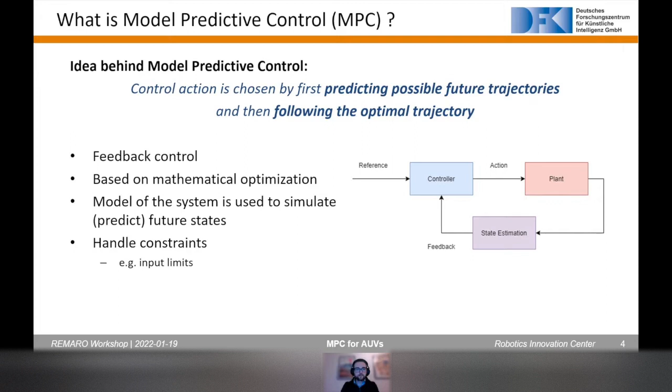I do want to give a brief overview about this, but as I know you get another workshop more dedicated towards optimal control and LQR, a lot of these things will show up again. So I will just go briefly over this. But yeah, it's important to give you an understanding.

So essentially, to predict future states, we can use a discrete description of our system dynamics, a discrete system model, and this can look like the equation shown here. We have x at time step k plus 1, the next time step, and this will be a function of the states at the current time step, x of k, and an input vector u also at time k.

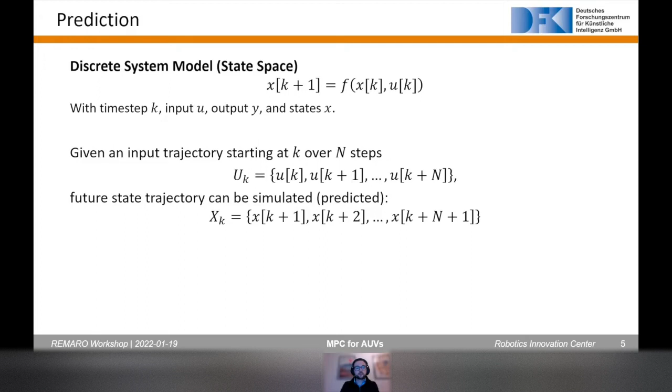With this, we can iteratively compute the system dynamics at the next time step, the next sampling interval, and thus iteratively calculate a whole trajectory. So for example, if we have an input trajectory, we can calculate all future states, provided, of course, that we know the current state. So this is the prediction part already covered.

What we have to do now is essentially calculate a whole bunch of these trajectories, and then we evaluate them based on some cost function. We can use a quadratic cost function for this, where we put a cost both on the states and the input. With this, of course, any state that is not 0 has a cost. So you can also think about this as a state deviation.

So maybe x is your error that you want to minimize. Works in the same way. Here, let's say we want to regulate all our states to 0. Then this is the appropriate cost function. And we also want to penalize using a lot of input. These x and u are for all x and u in their respective trajectories.

Similar as before, we've talked about this 2 times already today, so this should seem somewhat familiar. We have again weight matrices where we can decide how much we want to penalize the use of input and how much we want to penalize the state deviation. According to this cost function, we then get the optimal trajectory, which is the trajectory that leads to minimum cost.

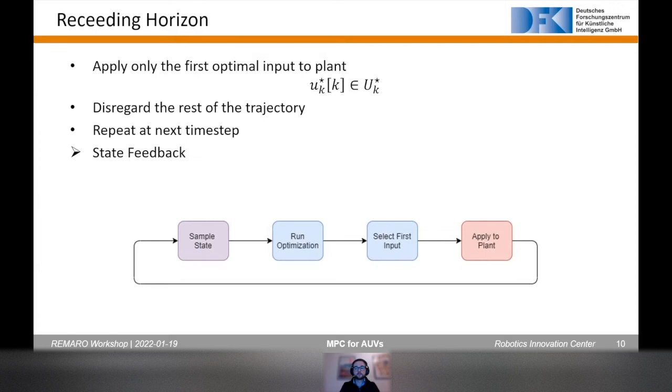Okay, let's come to how we implement this on underwater robotics. So first of all, let's try to motivate why we want to do this. There are many good reasons. As I said, thruster constraints can degrade performance in traditional control systems if they are not considered inherently. That can lead to limit cycles, for example. And so it is desired to represent those also in the control law.

And then, of course, we now have the possibility to get good models, and we actually want to use them and be able to exploit them. And that is something that MPC can do, and it can also handle coupled systems. So there are quite a number of advantages that make it applicable to AUVs. Another interesting thing is that AUVs are typically characterized by slow dynamics.

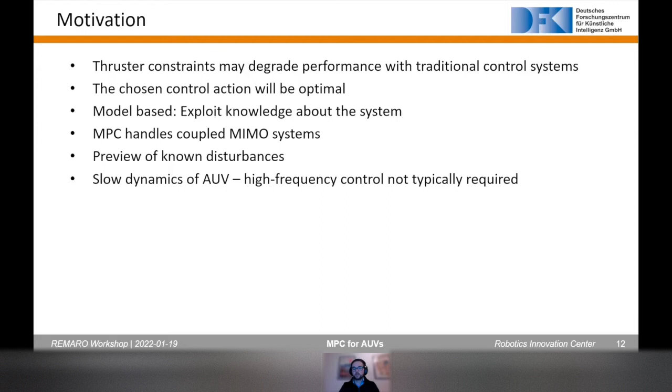And since MPC is computationally costly, high frequency control is rarely achieved with MPC, at least for very long prediction horizons and very high system order. And so here it should be much more easily applicable.

But one thing that we use it especially for in research, and also done by a master's student of mine, is for a disturbance preview. So that means in some cases we are able to predict disturbances, or external forces, that are acting on our system, for example, by a moving manipulator.

So if the manipulator is controlled by an operator, or just follows a given trajectory, then we know in advance how it is moving, at least to some degree. And why not use this already in the control law? We can simply do this by including this as part of the system model.

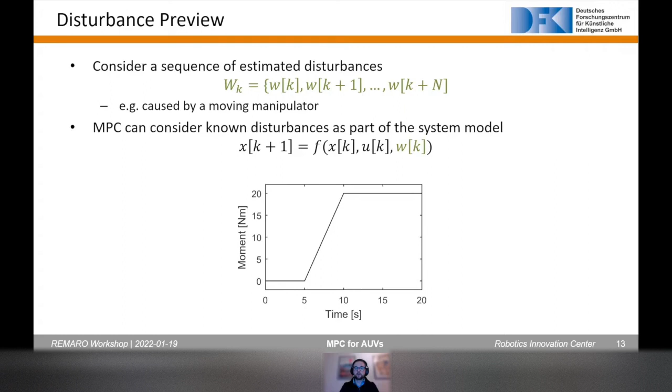And so a disturbance caused by a manipulator could be something like a ramp seen here. Of course, it's a simplification, but we give some sort of torque on one degree of freedom, and we try to compensate that. And this is what has been done. So here, based on quadratic programming and a linearized model of the system, we'll essentially try to keep the vehicle in a neutral orientation. And at 5 seconds, we apply this disturbance, and what we can see here is how different approaches lead to different results.

So in the open loop case, this disturbance is actually quite large and leads to a deflection of about 40 degrees. And if we have MPC but without preview, then we can lower this already to about 5 degrees, which is not perfect, but the MPC here itself is not very aggressive. And if we then include the preview, then we can see that we can actually very much get rid of the disturbance, and what we're left with is essentially caused by the sampling intervals.

If we look at this in a bit more detail, then we can really see what's going on. So at 5 seconds, this disturbance is placed on the system. And even before that, at 4 seconds, the vehicle starts to prepare, starts to react, because the minimization routine tells it, okay, it's better to accept a small deviation early on to reduce a large deflection later. So you get a little bit of this in the beginning. Before 5 seconds, you get a little bit of oscillations that try to prepare for this disturbance. So it's what you expect, but I think it's still quite interesting.

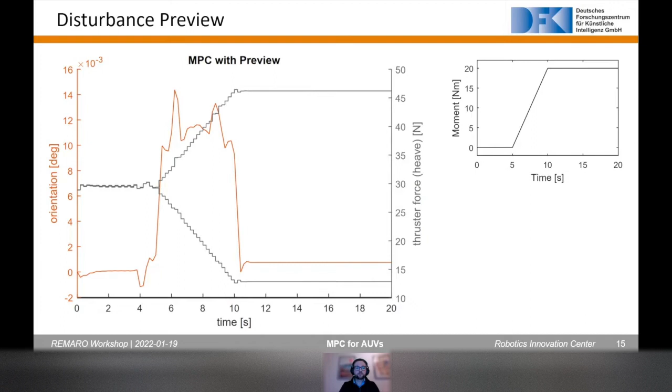MPC is in some sense a very intuitive control law, which I think this example can also make clear. It's a control law that, when it's done correctly, does what you expect. It looks ahead, similar to how a human driver would drive a car. It looks ahead and not only looks on the road below the vehicle. Okay, that was a short excursion into MPC and some of the preliminary results that we have done.

Any questions? Okay, I see 2 questions. Sasan, please. Yeah, just wondering if you use the same approach for providing trajectory as part of the planning component. So using MPC, you come up with trajectories, right? The trajectory. So that could be also used for the planner to follow that trajectory.

Yes. So in a way it is a hybrid of control and planning, at least very local planning. It's not an efficient approach for global planning, for planning long trajectories. There are better approaches, more efficient ones. But in some way you're right, it is also planning. And it is very useful for following a planned trajectory, because if you have a plan, it's like having a road. When you drive a car, you can see the road, you know where it's going, at least the next 100 meters or so.

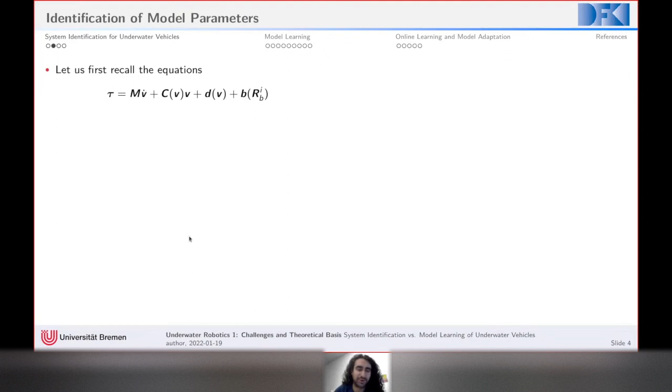So first of all, if we just recall the equations that we have, I think you are now a bit bored to death from these equations, but if you basically just expand them and arrange them in a way as if we are having a linear system, so y are all of the dependent variables. For example, they could be in this case the tau or the actuation. Theta would be all of your unknown parameters that we've seen before, like these added mass elements or the drag elements or all of this kind of stuff.

And then x here basically is just a matrix that you can construct by just concatenating all of these nonlinearities in the system that you have. For example, acceleration, velocities, whatever model you choose. For example, for the damping that you have, you can align them in this kind of matrix form, which would be here in this case m by p. So basically, m is the number of dimensions that you have, which is 6, and p is the number of unknowns. So all of the parameters in your system that you don't know is p, basically.

And then theta is this vector that represents all of the unknown parameters, which you can also just concatenate in such a way. So like the added mass parameters, the damping parameters, and whatsoever. So you have p unknowns, and if you just do this multiplication, you just recover back the original system. So how do you want to now identify that? This is a very simple problem then.

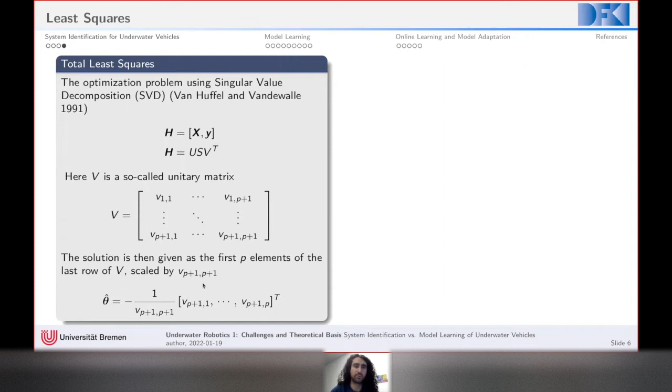So instead of using the Moore-Penrose pseudo-inverse, you could do a singular value decomposition of the concatenation of your samples, so x and y in this case. And the singular value decomposition will decompose your matrix into three matrices. And then if you take V, the so-called unitary matrix, basically just taking the first P elements of the last row will give us these thetas scaled by the last element. For proof of this method, you can check out this. I think it's a little bit too much for this.

Another method is recursive least squares. In the end it's basically doing the same thing. There are some differences between those methods, like ordinary least squares, for example, takes into account noise in the targets, but not noise in the inputs. However, these two methods, recursive least squares or total least squares, will try to correct for noise that you would have in both samples.

So recursive least squares is very similar to what a Kalman filter is. First of all, you have a covariance matrix P, and then given a sample, you propagate it forward. R is also here the measurement noise. So you usually set it to a fixed kind of matrix, to try to model how much noise you expect in your system. Then you calculate this rate of change of the parameter theta, which is similar to a Kalman gain.

And then you just update your estimate and then update the covariance matrix. And this could also be done online. So you don't need the whole data in one go, but you can do it when samples arrive sequentially. So this is how we could identify. Of course you need to collect data. You need to find a way to capture this ground truth of your robot or data that you have.

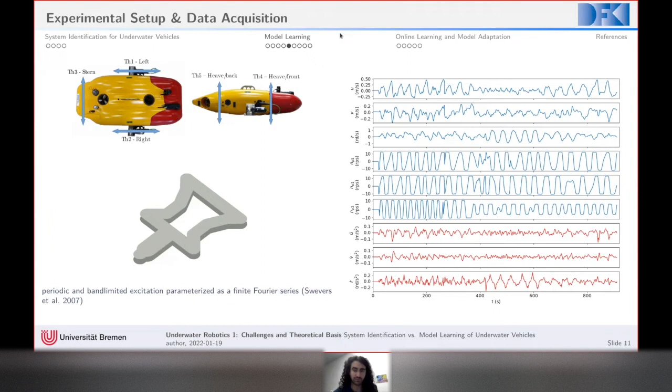So we take that, plug it into all of these systems that we've seen before, and pass this into a k-fold cross-validation. The reason for that is to also find the best hyperparameters. The idea is that you take the data set, first take a test set apart and train with the rest. Then in the second fold, take another part of the data and train with the rest, and so on. In the end, just get the average of those, or you can also plot a box plot that shows the differences. The idea behind this is also to see how biased each model is.

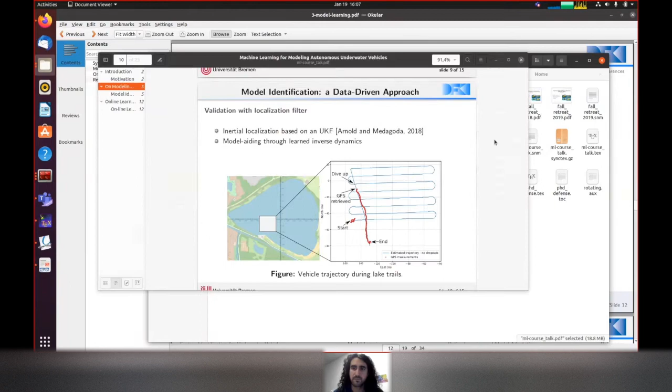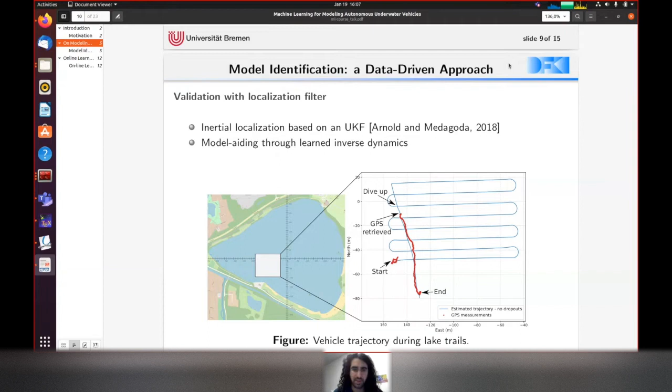So here's another. Actually, before that, let me show you a bit more results. I didn't include them in these slides, but I have them somewhere else. Yeah, exactly. So I took the best performing model from the model-based approach, or from the classical, let's say, parametric approach, and the best SVR. And then I used the same observer filter that I talked about a bit earlier during the docking.

And here's one experiment we also ran with a robot in the lake here near the university. So here you can see a little bit. We started here, we ran like a lawnmower pattern. The red are GPS measurements, just for ground truth. And we traced this lawnmower, I don't know, 100 meters in each direction. So overall it traveled around 800 meters, and then here's where we dive up, and this is where we get the first GPS fix.

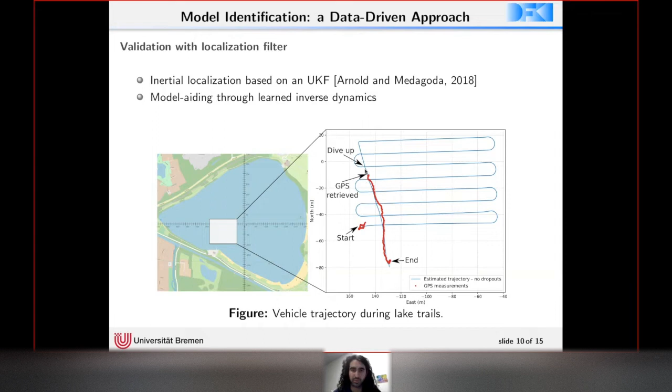So you can see here with the full-blown observer or Kalman filter, with all the sensors in, so IMU, DVL, and the depth sensor, it performs quite well, especially that when we go up, we directly go where the GPS fix is. And we tried later on in post-processing to cut off the DVL, for example, on the curves, which are the hardest part. So everything you see here in green, we just intentionally stopped the DVL from working. And these are the results that we have.

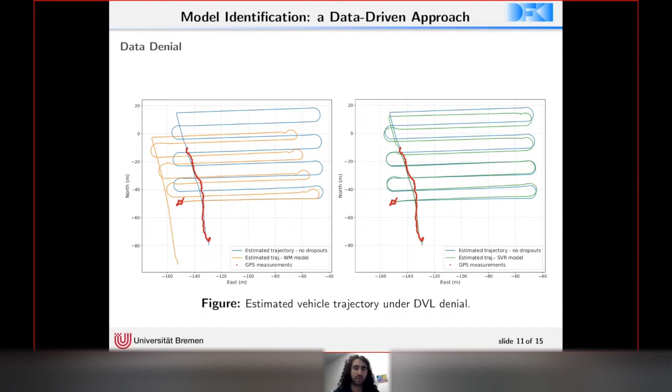So this one here is the results where the WM or Whitcomb-McFarland model, this physics-based model, this is how it performs compared to the support vector regression model, and this is how this one performs. So you can see a little bit, also a proof that if you take these models that we learned and put them in some practical application, how the difference would look like. So go back to this slide.

So another thing that we tried to do: before, we were just taking any method for function approximation and then trying to learn directly from the data from scratch. However, one thing that I was asked was, okay, what do you do with all this knowledge that you talked about? Why do you throw it away? And since we have physics models that perform quite well in the end, okay, we have a bit better approximations using, say, support vector regression, but what about combining the two?

So one approach I had is first to actually learn the residuals. So first take a physics-based model, take the classical model, identify that, and then learn the error between the data and whatever the model produces. In another sense, we are trying to estimate this part of the equations, which is the unmodeled effects that we still do not capture with a physics-based model.

So that's one approach. Another approach relies on the idea of transfer learning. So the idea here is I took this physics model, plugged it into a simulation, and then just ran the simulation and collected more data. And then basically I took the simulation data, which gives us something close to reality, but not fully, and then pre-trained an LSTM model.

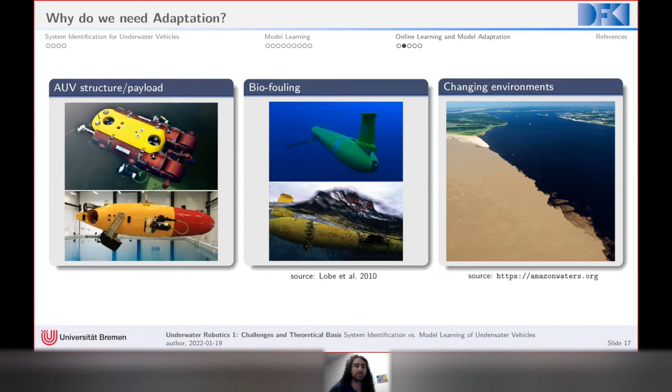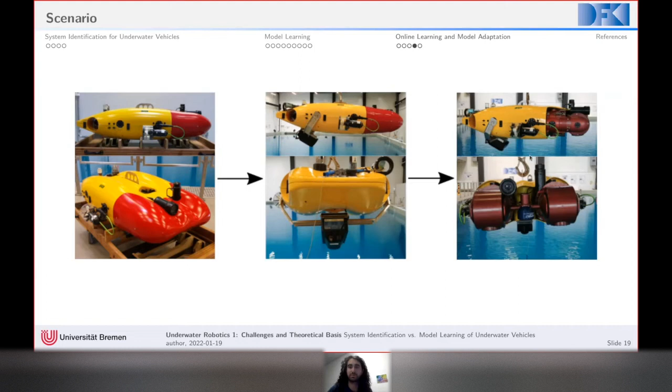And here's a bit the scenario that I tested. So I took this vehicle with the default setup, let's say. Then we transitioned here. We added, for example, a payload like a sonar to change the drag, so this induces way more drag. And then the last part is we took off this front hydrodynamic hull to also add more drag and change the geometry.

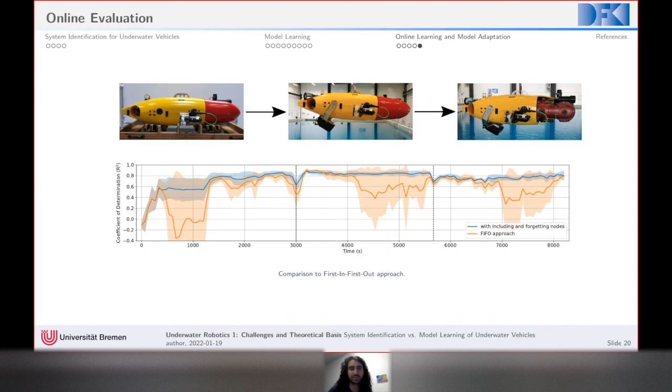Yeah, that's most of it from my side. Again, if you want to read more about it, there's a paper I published in ICRA that talks in more detail about how I do all of these kinds of conditions on the learner.

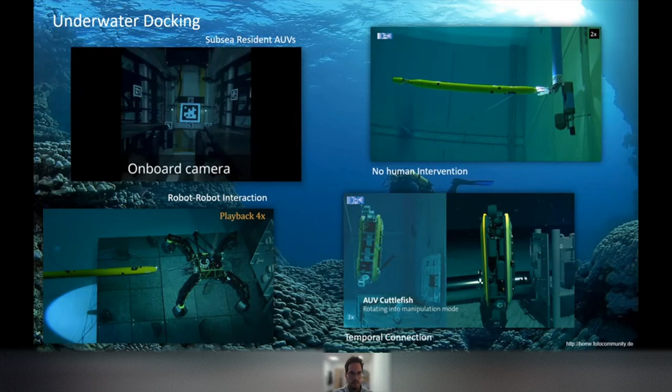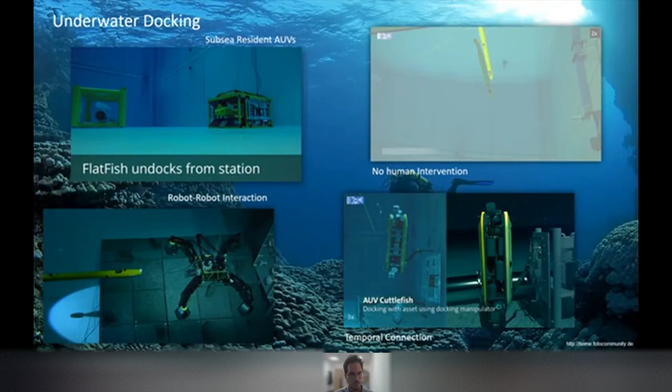And also this other application, Cuttlefish, that has already been presented by Christian. It has a couple of manipulator arms which can dock on the platform. So it then provides to the operator, who can be remotely somewhere in the world, the ability to manipulate the other manipulator and see also what the Cuttlefish is seeing with the cameras. So there are some applications for docking.

And we already mentioned, as Bilal said before, that mostly we're using vision-based approaches with markers because they are very accurate. But as he already told us, it's not always that nice, as in the basin that we have. So for example, we are in the lake, underwater, and when we find the docking station somewhere, we cannot see almost anything. And if we're far away, like 2 or 3 meters, we cannot see the markers anymore. It's so distorted that it's very difficult to see. So it's difficult to dock because it's difficult to see the markers. So we might use other modalities to cope with those.

Of course, we have maybe models, and we have the control chain that we haven't seen, in which we have an observer so that we can then figure out where we are. But it would be nice to have all the perception somehow to localize our docking station. Because as I said, with vision we're lacking robustness in demanding environments, in this case in turbid waters and so forth.

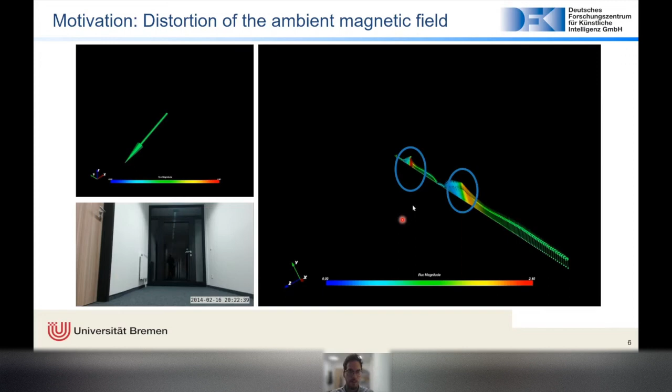So as you see, every column has its own magnetic signature, so we can even identify which column is which, and also the position according to the model of the AUV and the inertial sensors that we're using to position the AUV. So we have two columns here, definitely, so we can position that. Imagine that that is our docking station, for example.

And of course, if you have, like our floor, many columns and many artificial structures with high magnetic permeability, you can even use that for a kind of SLAM. And actually, there is a nice, interesting paper and method called MagSLAM, which uses this measurement to make a kind of SLAM of your floor, for example, which you can use for navigation.

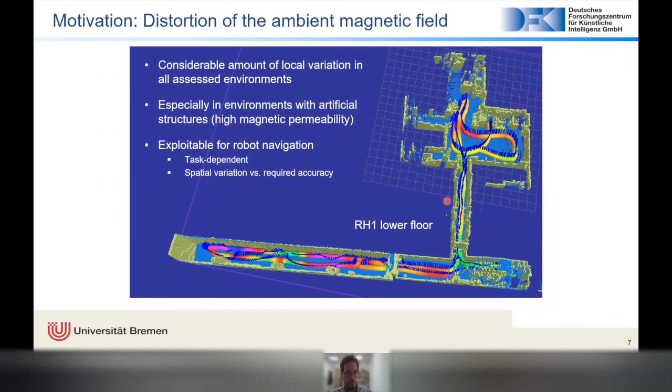But let's go to the problems, because in the same way that the docking station has its own magnetic signature, the robot has that as well, because it has a body and some materials that can distort the magnetic field. And the problem here is that they are normally not static. You have motors, and the distortion of the motor changes depending on the RPMs. But also, if we have a manipulator moving its joints, the magnetic elements are changing all the time relative to the magnetometer, which will then feel a different distortion.

And of course, we have a lot of electronics that can be very compact, sometimes close to the sensor, which also produce electromagnetic distortion, like current flowing through the electronics, but also some oscillating fields that happen with the transistors and other switches.

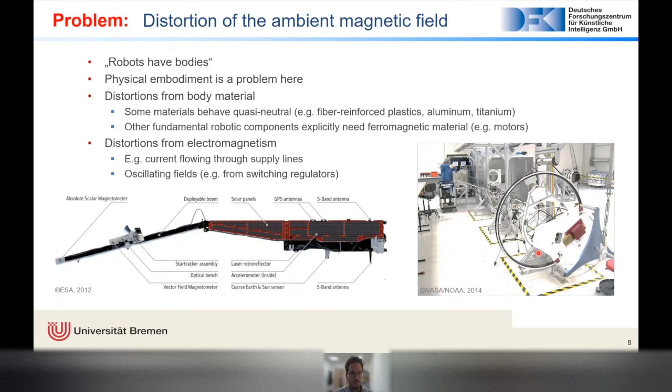That's why normally, when we want to measure the magnetic field of the Earth very accurately, like in these two satellites, one from the European Space Agency and one from NASA, they try to put the magnetometer as far as possible from the satellite. For example, there's this boom here of a couple of meters, and the same here. So they put it very far away, so all these distortions are minimized. But we cannot do that with robots, so we have to think about other possibilities.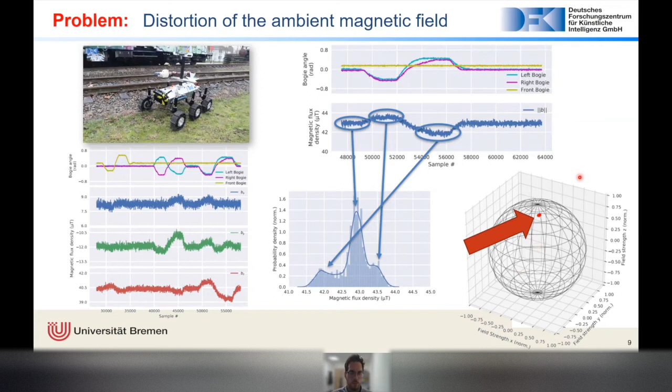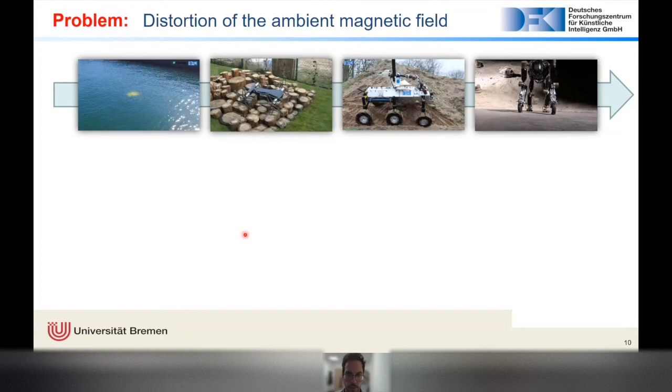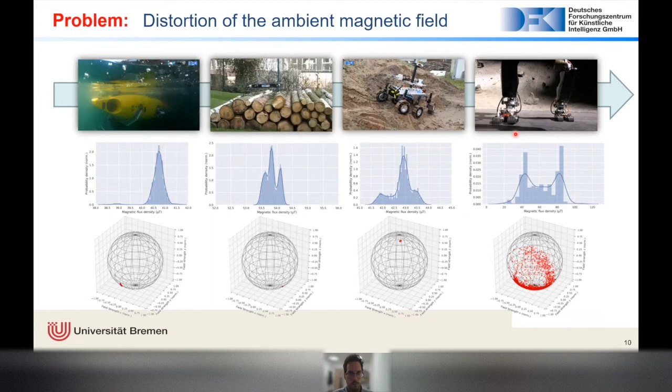And of course, depending on the complexity of the robot and how many degrees of freedom it has, the distortion is going to be different. So we have four different robots here: the one Bilal presented, Oscar, Artemis, and Charlie. And they have different magnetic signatures. For example, Charlie is this robot with legs and arms because it's simulating a monkey. It has a lot of distortion, so it's very difficult to get a clear measurement from the magnetometer.

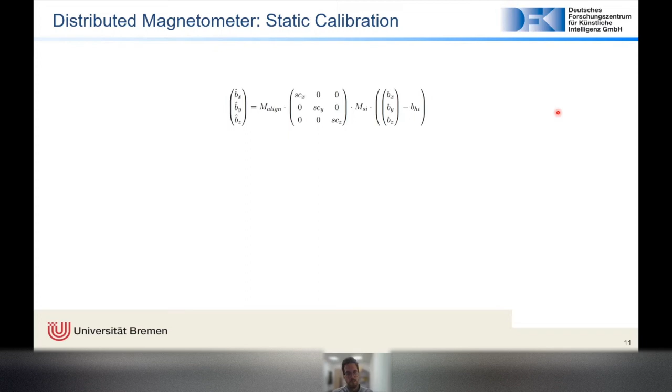So how can we solve that? Well, first of all, there's the classic way that is called static calibration, but that's not really helpful. So what can we do? Let's go through it. If we have multiple magnetometers in our robot, then we can try to fuse them, so they align them and scale them and make some conversion so they are together, and then try to calibrate the effects of soft iron.

Soft iron is the ferromagnetic effect, so the material doesn't create a magnetic field, but when a magnetic field is flowing through, it changes and distorts it. And then there is the hard iron effect with a proper magnet or an inductive magnetic field through electronics, for example. But if they are static and we know them, of course we can gather some data and try to calibrate them. And that is the classical way to do it.

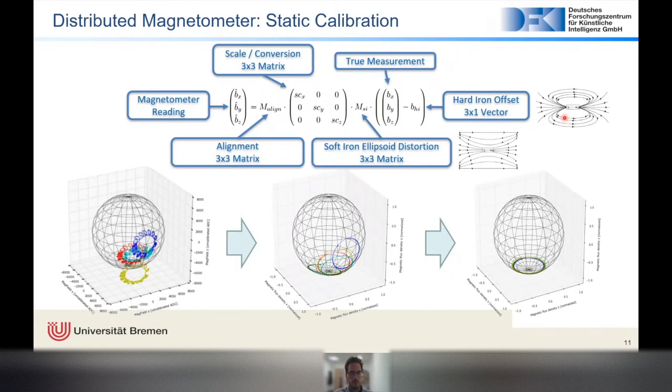Of course, that is not going to help a lot when we have a magnetometer close to the thruster, and that is actually the case here. For example, we have these magnetometers here, and the blue one is very close to this thruster. When we're gathering the data, we can see how much it distorted the measurement of the blue, but also the other ones. You can also see that the closer we are to the thruster, the more distortion we have.

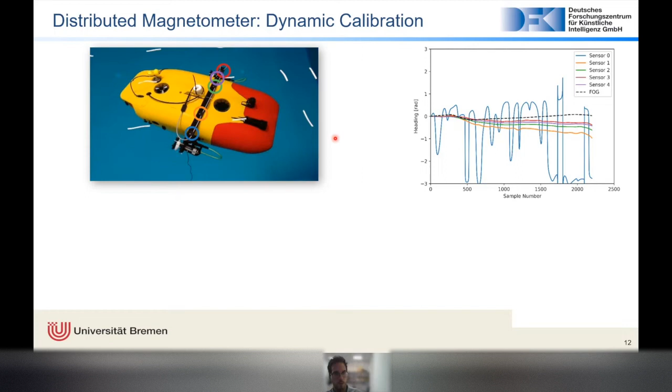So we might want to make a dynamic calibration. A simple way to do that might be to have a probabilistic filter. For example, one that in our case has provided quite good performance and is quite fast to use is the von Mises-Fisher distribution based on stochastics, and it has a kappa parameter, which you can tune, and there are methods to tune that depending on the position of the magnetometers and your AUV, so that at the end you can filter out this high distortion.

So the orange one would be the average of all the 5 sensors, and the green one is the one filtered through this method. It's still not like the ground truth that is measured by the gyroscope, but it is definitely much better. But we can do better, right?

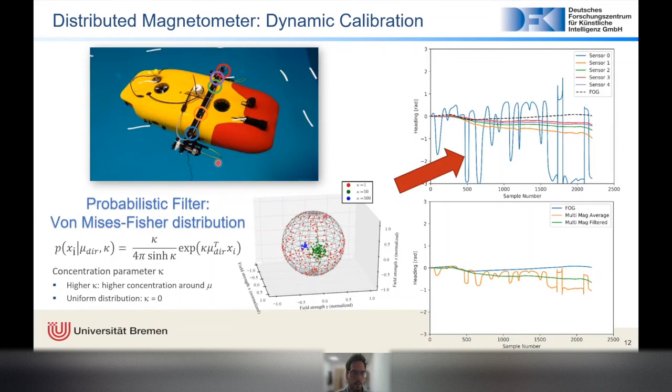So the thing is, we actually have a measurement of the RPM of the thruster. That is like a proprioceptive sensor, let's say, in our thruster, with which we can measure how many RPMs we're giving right now. So we can use that also to calibrate. That is what Leif Christensen did in his PhD.

And of course, here you can use different methods. The simplest one would be what Bilal also used, SVRs, support vector regressors, and also MLPs, multi-layer perceptrons. Since it's not a very complex model, we tried both. And since the multi-layer perceptrons can also couple these effects for X, Y, and Z, and also all the sensors, it's much more flexible. So at the end, it always performs better. And we figured out that it doesn't have to be a huge model.

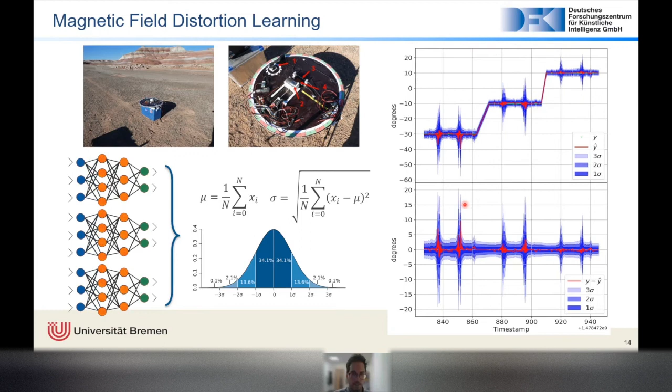So we can see that actually, go back. So here is the filtering, and here is only the error. So we see that where the peaks are is where our model is actually more uncertain of the measurement. And that's actually very useful information to say to the controller or the navigation filter, hey, we're giving this data, but we're kind of uncertain about this.

There are also other methods, like for example, Monte Carlo dropouts. And I will put some articles on the references, which you can check out from some of our colleagues that are working with that. Quite interesting. Yeah, here, for example, when we already have the model, we can then definitely compensate the distortion that is dotted with blue, so that at the end, all the measurements are very centered on a point. That's actually what we want.

So we can use the same method in robots, of course. For example, we did that with SherpaTT. It is this rover that is made also for space to make exploration on Mars. And you can see that it has many, many degrees of freedom, not only because of the wheels, but also every wheel has its own arm, let's say, manipulated to change and trying always to have the base stationary. So that it can always go through all the craters and whatever terrain that you find on Mars.

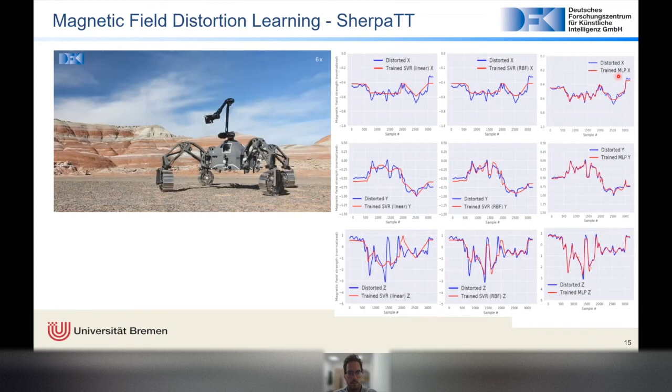Yeah, so we use the same. Here you can obviously see the SVRs. We also tried that. And also the MLP, and the MLP performs actually better. So I have some results. I will also put the paper with this work on the references. So now we have the static calibration and the dynamic calibration.

So now we want to use it for localization, right? So how we do that and how we are starting to do that? Well, we have the basin with a crane. Yeah, so the idea is, go back a bit, that the docking station has a kind of a structure with soft or maybe hard iron effects, which we want to model. So we want to learn, if we move around all the positions around this docking station, how actually the docking station distorts the magnetic field, and therefore find out the magnetic signature of it.

As an example we could do here, we have this structure, right? Also we have the marker to have the ground truth. And we move with different trajectories around the marker and gather some data to try then to figure out the model with MLPs, or also support vector regressors, and to try to localize ourselves, and the predictions are quite impressive and quite good. So we tried that also with our AUVs. And the first test was quite good.

We made 10 different runs, and at the end, it looks like support vector regressors in this case perform better than MLPs, and that is because they can generalize better. But we want to do some more experiments and go in that direction for the project. And we see that at the end, we have an error that's staying below 10 centimeters. And actually, the idea is that the closer you are to the docking station, the better accuracy you have. In the opposite to all the other systems, right?

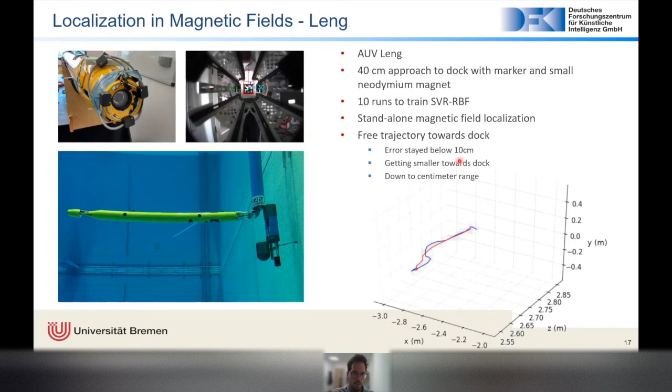So as Bilal mentioned, markers and acoustics and all your navigation systems like USBLs and DVLs, the closer you are to the docking station, probably they're going to have worse accuracy. But in this case, you will increase it. So that's what is good about it, and good to try to have a combination of all these navigation sensor modalities, let's say.

Okay, I don't know how I'm doing with the time. Can I go on a 10 minute excursion to underwater perception, Bilal? Yeah, go ahead. Okay. If people are not so tired, I think it might be also a little bit interesting, since there are not any more equations or mathematics, it's just some insights. So yeah, exactly.

It's more what kind of methods are there, what we're doing on the project. That's an interesting project that we started 1 year ago, and we do it with Bilal together. And what is interesting about it mainly is that we're going to gather a lot of data, also creating methods for underwater perception, which is kind of a niche. Not a lot of people are working on that. And all this data is going to be public, and you might use that for your PhDs if you need that. So I think it might be interesting to follow what we're doing, and definitely maybe use the data sets that we are going to record.

So first of all, what is multimodal learning? I already mentioned what we want to try to do, right? So we have cameras and sonars, and they have their pros and cons. So we want to fuse them to try to have a better perception underwater.

So sensor modality, as a definition, is different means for perceiving the world. And when we have a multimodal system, like us humans, we have different sensors to perceive the world and to try to describe it in that way. So we can see, we can hear, we can taste, we can smell, and also we can touch, right? So we are multimodal systems to perceive the world.

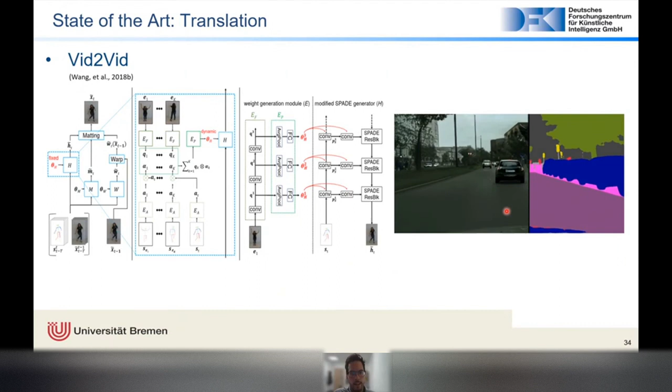Then quickly, I will go through self-supervised learning, which I think is a very interesting topic. Maybe if you could go through it a little bit fast and try to wrap up.

Done. Self-supervised learning actually is like transfer learning, and the problem that we have underwater is that we don't have huge data sets of sonars. Mostly we might have a lot of unlabeled sonar data. So with self-supervised learning, we can do transfer learning. We can try a pretext task with the unlabeled data, and then transfer part of the encoder to our target task. So we have some labeled data that's much less than our unlabeled data, and this way we can have a very good model even with very little labeled data. It's one of the aims that we are approaching here, because unfortunately underwater we don't have huge data sets out there.